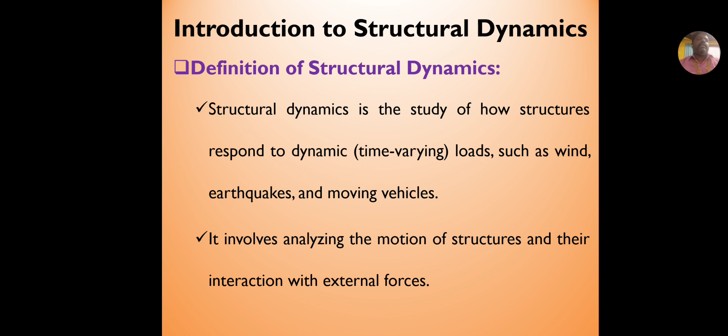So, the study of the behavior of a structure, or the study of how the structure responds to a dynamic load, is known as structural dynamics. For example, wind loads, seismic loads, or vehicle loads come under the category of dynamic loads.

So, we saw the basic definition of structural dynamics, and now we can see the importance of structural dynamics in structural engineering. Since structural dynamics is a vast area, we limited structural dynamics to structural engineering for the purpose of our course. The importance is that it is very useful and vital for modern structural engineers, since they use structural dynamics concepts to design bridges, buildings, or other structures to ensure how much earthquake load or dynamic load is going to affect their building.

So, with proper knowledge of structural dynamics, we can ensure the amount of forces or the effect of dynamic forces that are going to act on our structures. These effects of dynamic forces can be caused to a structure in the form of seismic force, wind pressure, vibration from machines, and dynamic load from automobiles or locomotives.

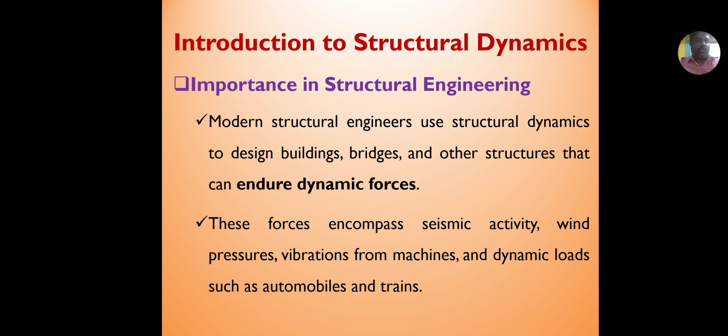So, the main key points for the importance of structural dynamics are: first, we have to ensure the safety of the building. Second, we have to improve the seismic design, and third, we have to control the vibration, and we have to reduce the material usage. So like that we have some key points of importance of structural dynamics in structural engineering.

So when it comes to ensuring structural safety, the engineer can use structural dynamic analysis to prevent catastrophic failures of a building. Since dynamic loads are unexpected loads, due to unexpected conditions, a normal design or normal analysis would not help to prevent catastrophic failure. But in the case of a dynamic analysis, the system will be properly designed for the seismic forces, the wind forces, or any other unexpected dynamic forces.

So, due to this proper design and analysis using structural dynamics, the building will be safer and catastrophic failures will be prevented. The second case: when the building is capable of absorbing and dissipating energy, the building will easily take care of the seismic forces. So, when we are constructing a building in a seismic prone zone, we have to ensure that the building is quite flexible and has the capacity to absorb and dissipate energy. In that case, the building will maintain long term longevity.

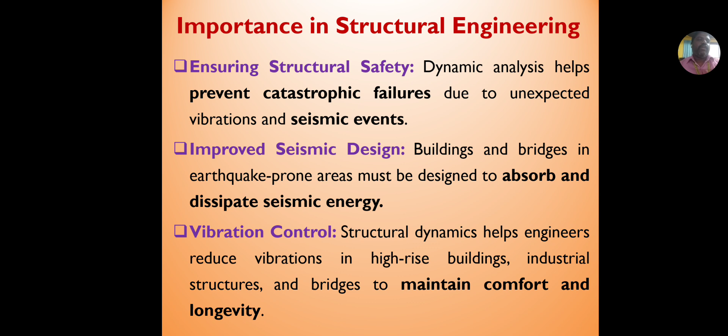And with strong knowledge and clear understanding of structural dynamics, or the dynamic behavior of a structure, we can easily build a structure that is strong and fully efficient, so that we can reduce the material cost of the building also. So if we are strong in structural dynamics, then we can easily understand the behavior of a structure under dynamic loads.

So when we have clear knowledge, we will be able to design a building with proper seismic design, and due to the proper seismic design, the building will be more efficient, which will in turn reduce the unnecessary material cost.

And in the case of bridges, the long-term durability and reliability of bridges and transportation systems can be increased by having a good idea of structural dynamics.

And the two main fields where structural dynamics plays an important role are aerospace and offshore structures. In the aerospace field, we deal with dynamics only. All aircraft should be designed for dynamic loading, so structural dynamics plays a very important role in designing aircraft, ships, and offshore platforms.

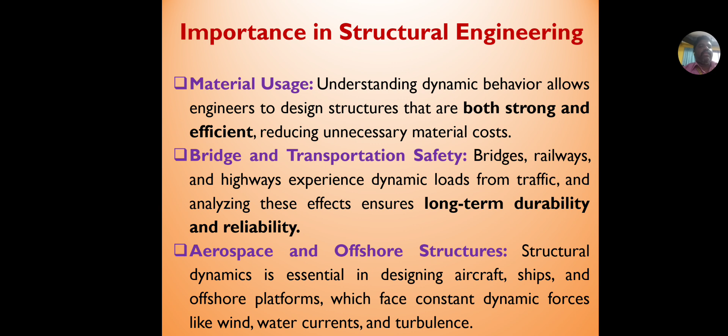So, while constructing an aircraft, offshore structures or ships, dynamic analysis should be done and proper structural dynamics knowledge is needed. So these are the importance of structural dynamics in the field of structural engineering.

Then we can see the applications of structural dynamics. The application of structural dynamics is very important in predicting the response of a structure to seismic and wind loads. With proper structural dynamics, we can easily predict how the dynamic forces will impact the structure, and we can design according to that.

If we are constructing in a normal place, then we can use normal design. But when we are constructing in a seismic-prone zone or a place located near a fault region, then we have to consider seismic design. So to make a seismic design, we should know what structural dynamics is.

When we know about structural dynamics, we can easily design a building for earthquakes, so that we can easily construct an earthquake-resistant building. For example, skyscrapers are built with tuned mass dampers. So what is the main purpose of tuned mass dampers?

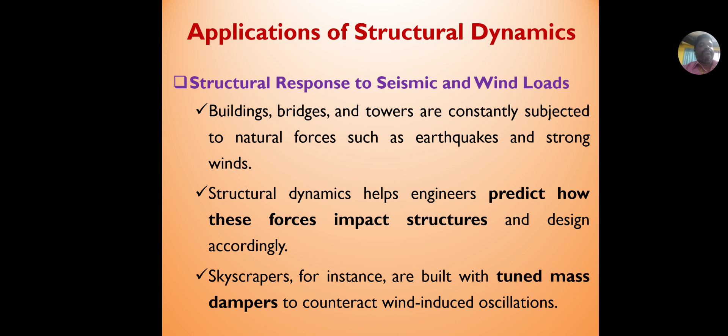So secondly, in the case of vibration analysis of bridges and buildings and towers, the structural dynamics is applied. So the engineers use modal analysis to identify the natural frequency. Why? Because in any case the natural frequency should not match with the exciting frequency or external forces, because when the natural frequency and the exciting frequency meet each other, then there will be a resonance formed.

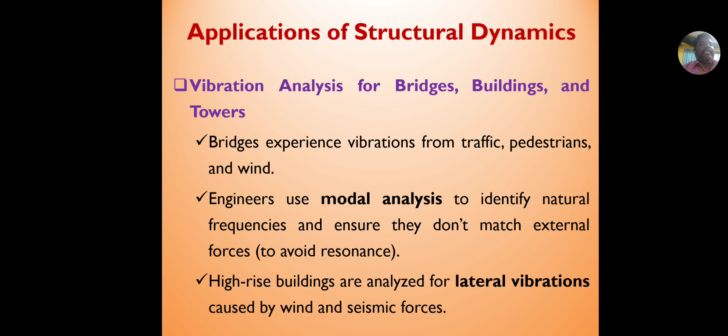Resonance means severe damage. So to avoid resonance, the natural frequency and the external forces or the exciting frequency should not match. So to maintain that, the structural dynamics is applied in the vibration analysis of bridges and buildings.

Then to make a building earthquake resistant, the structural dynamics is applied. For example, the types of dampers, the amount of dampers can be determined by the knowledge in structural dynamics. So the building should also be flexible enough to reduce the seismic damage by controlled movement during the action of earthquake. So to make a building flexible and to install dampers such as viscous damper, friction damper and tuned mass dampers, the structural dynamics laws are applied.

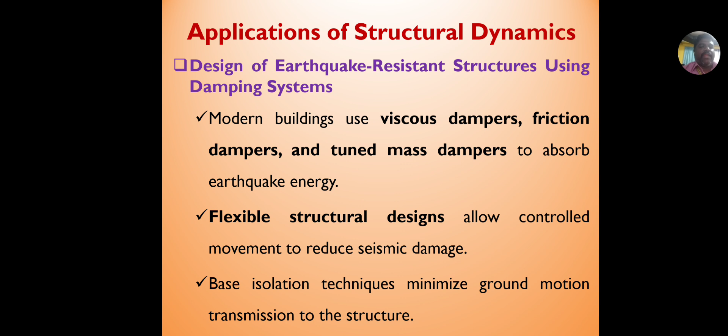And to enhance the overall performance of the structure, base isolation technique is very important in case of stability. So in the base isolation systems, the elastomeric bearings or sliding bearings are installed in the structure, which will decouple the structure from the ground motion during the action of seismic forces. So significantly, the base isolation technique will reduce the forces transmitted during the earthquake, and it will protect the superstructure.

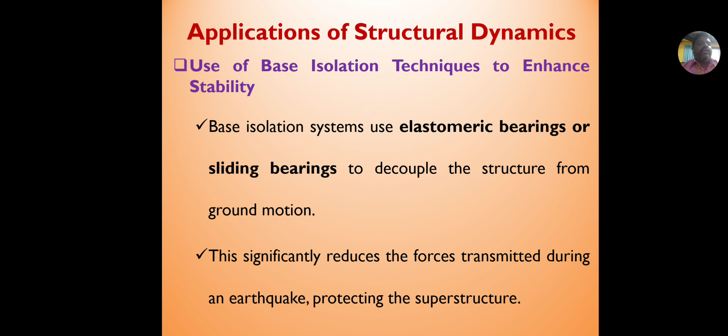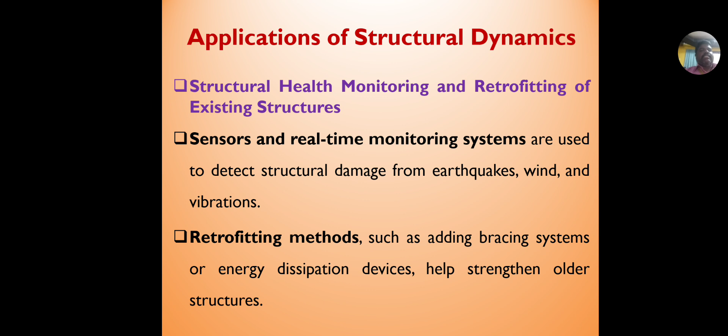So in the field of structural health monitoring and retrofitting of existing structures, the structural dynamics laws are highly used using sensors and real-time monitoring systems. So the sensors and real-time monitoring systems are used to detect structural damage from earthquakes, wind and vibrations. So these work under the principles of structural dynamics, and the structural dynamics is also applied in the retrofitting methods such as adding bracing systems or energy dissipation devices to help and strengthen the older structures. So, in all these cases, the application of structural dynamics is predominant.

So, till now we have discussed about the definitions of structural dynamics, the importance of structural dynamics, and the application of structural dynamics. Next, we can see about the types of loading. So there are two types of loading. One is static loading and another is dynamic loading. So before going to see about dynamic loading, we will just have a glimpse about static loading.

What is static loading? A static loading is a force that is applied slowly and gradually to a structure. Whenever a load is applied gradually or slowly in the structure, then they are known as static loading. The nature and characteristics of the static loading will be they will have some constant magnitude, there will be no changes in the magnitude over a period of time, and the point of application of the load remains same, there will be no changes in the point of application, and also the acceleration is completely neglected since there will be no movement of the force.

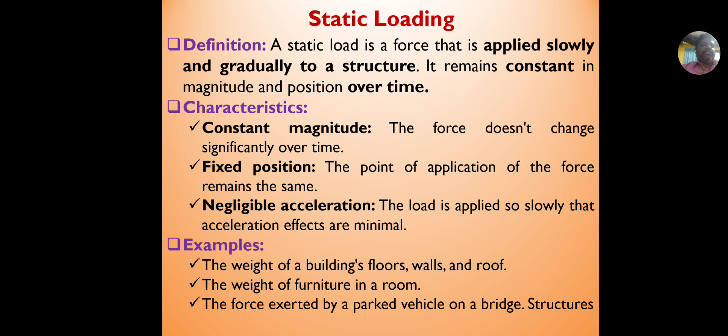For example, the weight of the building's floor, wall and roofs, the weight of the furniture in a room, the force exerted by a parked vehicle on the bridge structures are some examples of static loading.

In terms of dynamic loading, the load is caused by forces that are rapidly changing with time. So simply saying, a time dependent force is known as dynamic force, or time dependent loads are known as dynamic loading. The main characteristics of this dynamic loading are they will vary with the time. So the magnitude of the dynamic loading will be fluctuating and significantly varying with respect to time.

And due to the variation in magnitude, there will also be changing in position. The dynamic forces will not act at a single point of application. The point of application of the force will be shifted so that there will be no fixed position for the application of load, and due to the changing in position, there will be a significant acceleration. The load rate of change is important and it will lead into acceleration effect.

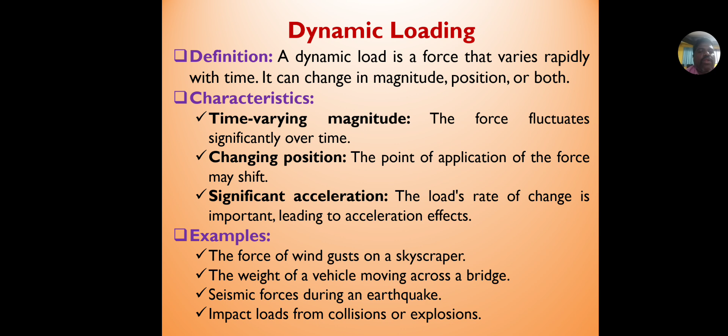The examples of dynamic loadings are the force of wind gusts on a skyscraper, the weight of the vehicle moving across a bridge, the weight of vehicles like cars, buses moving on the bridges can be taken as vehicle loads, and the seismic force caused during earthquake, and impact load from collision and explosion.

And we discussed what is static loading and dynamic loading. Now we can see the difference between static analysis and dynamic analysis. So the aspects such as nature of load, time consideration, inertial effect, equilibrium equation, application, and response types.

These are the aspects. When we take the nature of load, the static analysis will have constant load, but in the case of dynamic analysis, it will be time dependent or time varying loads. When we consider the time, the static analysis will have no time dependency, but in the case of dynamic analysis, there will be time dependency. In the case of inertial effect, for a static analysis, it is neglected, but in the dynamic analysis, the inertial effects are considered.

And based on the force equilibrium, the equilibrium equation can be solved in the static analysis, but in the dynamic analysis, the equilibrium equation includes the inertia and damping force. Without inertia and damping force, it is not possible to make an equilibrium equation in dynamic analysis. And the applications are used for dead loads and wind loads. And dynamic analysis is mainly used for earthquakes and vibrations.

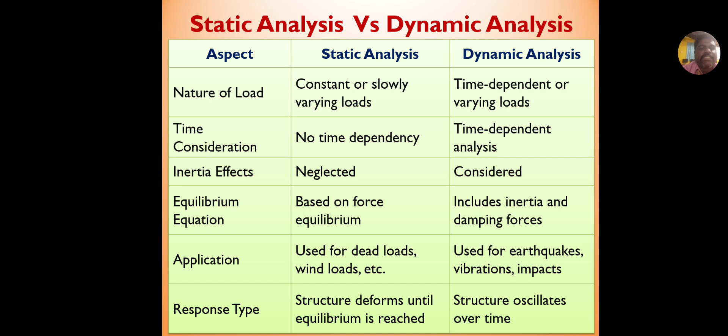A response type is, in the static analysis, the structure deforms until equilibrium is reached. But in the case of dynamic analysis, the structure oscillates over time. And in the field of building design, bridge engineering, machine foundation, earthquake engineering, aerospace structures, what are the applications of static loading and dynamic loading?

Let's see. In the building design, the static load is used for calculating the dead loads, live loads, wind loads under normal circumstances. But in the case of dynamic loading, it is used to design the structure against seismic loads, wind induced loads and impact loads. So, in the field of bridge engineering, the static loading helps to determine the effect of permanent load such as self-weight and vehicle loads only.

In the case of dynamic loading, it analyzes the effect of moving vehicles, earthquakes, and aerodynamic forces to ensure the safety of the structure. In case of machine foundation, static load is not considered since all the machines operate dynamically. But in the case of dynamic loading, the foundation for vibrating equipment should be designed properly to prevent resonance.

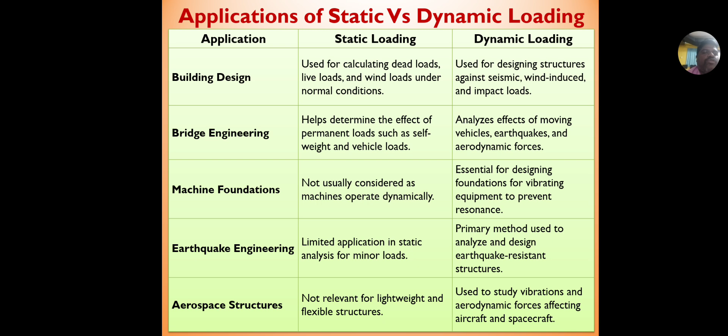In case of earthquake engineering, the static loading is limited, but the dynamic loading is considered as the primary method for analyzing and designing earthquake resistant structures. In the field of aerospace, static load is not of much relevance, but dynamic loads are used to study the vibrations and aerodynamic forces affecting the aircraft and spacecraft. So these are the applications of static loading and dynamic loading.

And generally, in this class, we have seen the definition of structural dynamics, the importance of structural dynamics, the application of structural dynamics, what is meant by static loading, what is meant by dynamic loading, the differences between static loading and dynamic loading, and then the application of these two kinds of loads were discussed in this class.

In addition to that, I want to share some information regarding the importance of structural dynamics in various fields. Recently, one of the emerging fields in the world is oil and gas. These oil and gas extractions are happening in the middle of the sea. So to complete the extraction of oil and gas, today engineers are planning to construct offshore structures. The offshore structures are built in the sea, so they are subjected to dynamic force in the form of wave force. So when you have greater knowledge in structural dynamics, you will have a good opportunity to excel in your career in the field of oil and gas.